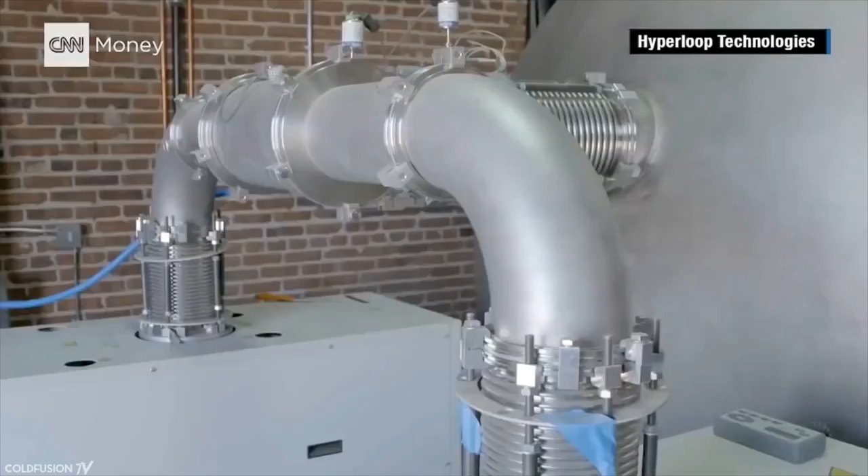In this video, we'll take a look at the Hyperloop, the brand new method of transport brought forth by the entrepreneur and billionaire Elon Musk. So let's get straight into it. First of all, what is it? Well, in broad terms, it's a fifth mode of transport. So far, throughout history, we've been using trains, cars, planes, boats, and technically rockets, but I haven't been in one, and you probably haven't either, so that doesn't really count. The Hyperloop is going to be the fifth form of transport.

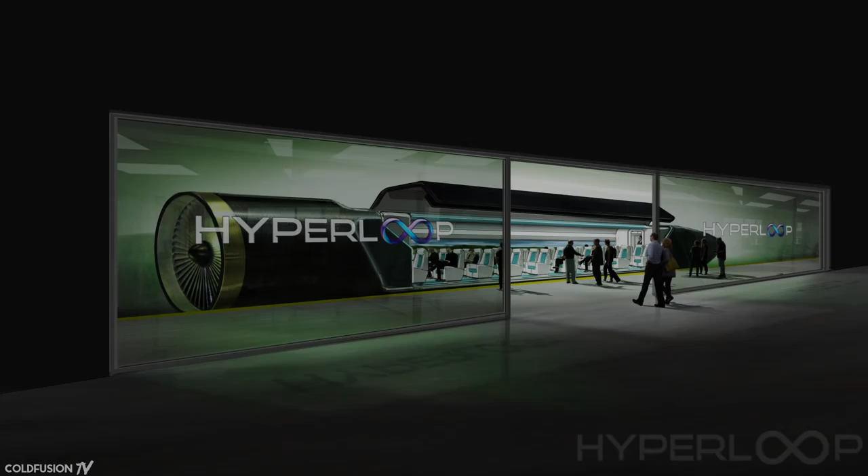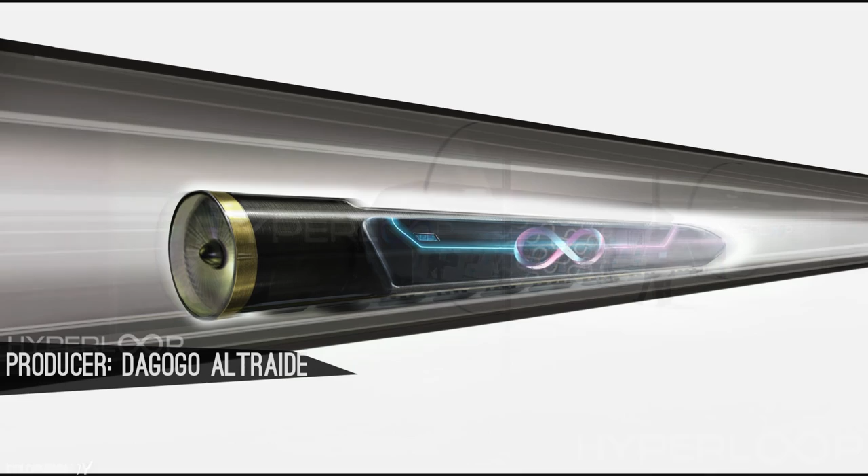So going into more specific details, the Hyperloop is a high-speed transport system in which passengers sit in a pressurized capsule that rides on a cushion of air. The capsule operates in a sealed, near-vacuum environment. The propulsion system is still to be chosen from a number of options, two of which are magnetic levitation or air pressure, similar to that of an air hockey table.

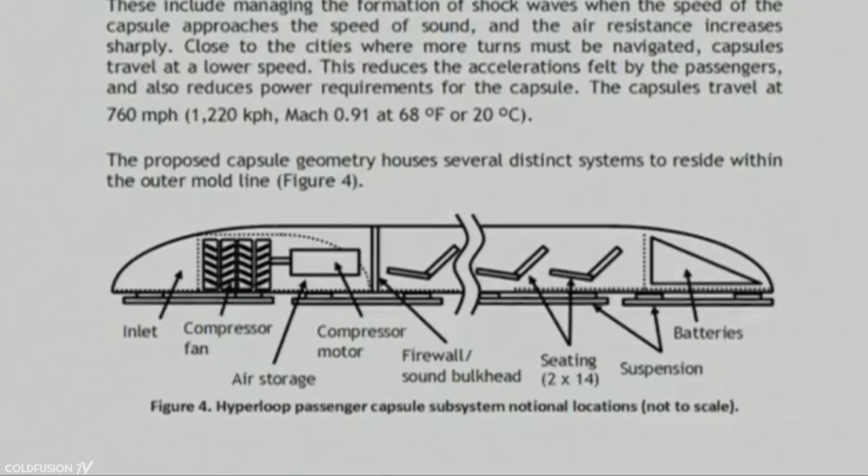The blueprints are pretty complicated. Well, blueprints are always kind of complicated, and I mean, yes, there's math, but it's really not that hard. It still sounds pretty complicated, Elon. It's like a tube with an air hockey table. It's just a low-pressure tube with a pod in it that runs on air bearings, on air skis, with an air compressor on the front that's taking the high-pressure air buildup on the nose and pumping it through the air skis. It's really, I swear, it's not that hard.

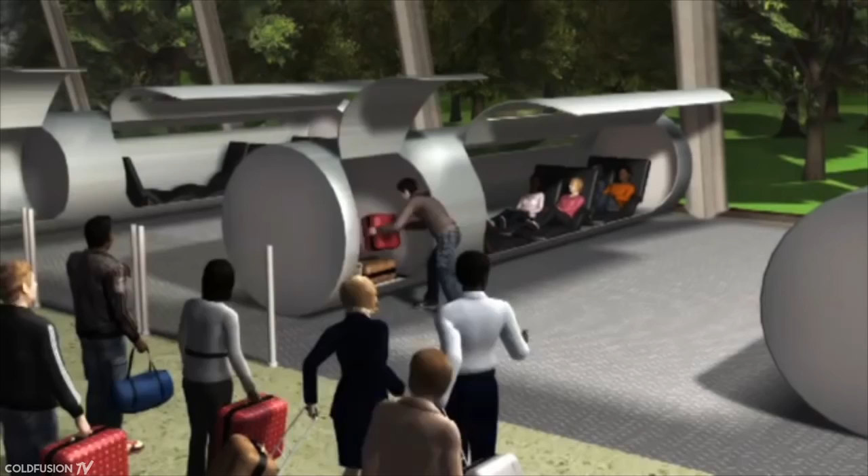The system is proposed to travel at an average speed of 900 kilometers an hour and at a top speed of 1,220 kilometers an hour. Elon really doesn't have that much time to do this one. He's too busy building rockets, electric cars, and batteries to power homes. So he's given away this idea and outsourced it in the form of a competition. Several companies have formed to take on the project, and even some all-star, interdisciplinary, student-led teams are working together to advance the Hyperloop technology. But more on this later.

So why does Elon Musk want to do all of this? What's the point? What we really intended to do with the Hyperloop was really to spur interest in new forms of transportation. And I'm starting to think this is really gonna happen. So, yeah. I mean, it's clear that the public and the world wants something new. And I think you guys are gonna bring it to them. So, congratulations.

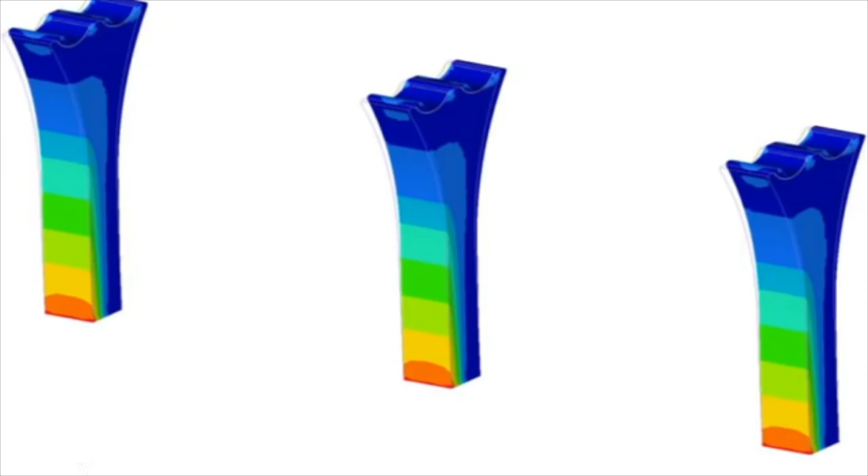Okay, so how did the idea come about? Well, back in 2012, Elon was at a Pando Daily event in Santa Monica, California. There, he announced to the world that he was thinking of a fifth mode of transport. This is that moment. And I'm thinking, like, maybe I should patent it and then offer to open source the patent to anyone that can make a credible case that they could actually do it. So I'm sort of debating it, but it would be for a fifth mode of transport. I have a name for it, which is called the Hyperloop. The Hyperloop? Hyperloop, yeah. Elon states in another interview that this initial concept came to him when he was stuck in LA traffic, which caused him to be 1 hour late for a meeting.

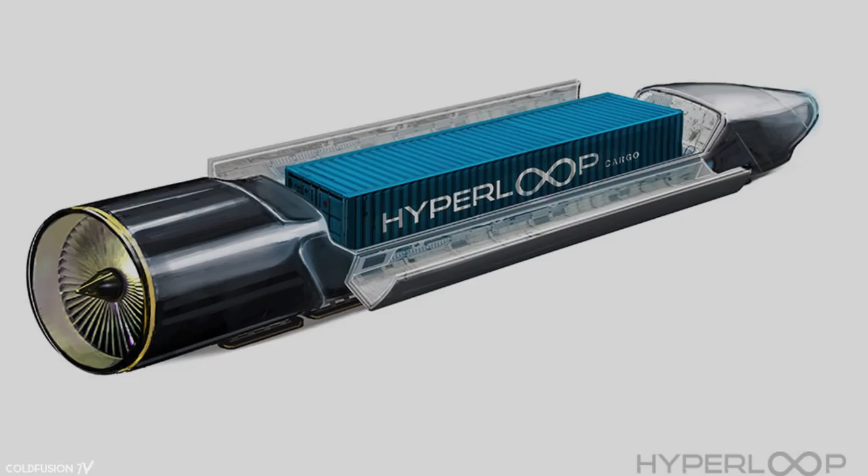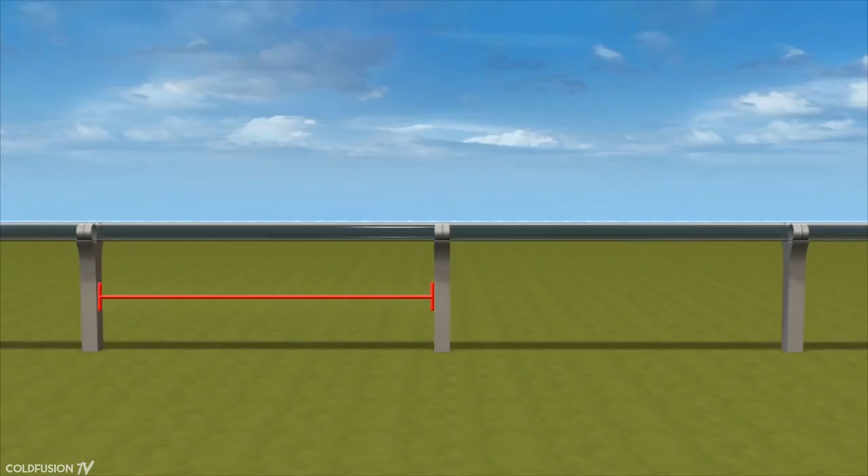So that's all well and good, but let's weigh out some advantages and possible problems with the system. First, the advantages. Theoretically, the pods can't crash. It's also much cheaper to build. It's about 1/10 the cost of the proposed California high-speed railway system. This means that tickets could cost as little as $25. It's also a lot faster. You can basically get from downtown LA to downtown San Francisco in 30 minutes, and it would take about the same time to get from Amsterdam to Paris. Just as a side note, for distances longer than that, it's actually more economically viable to use a supersonic jet.

It's also extremely energy efficient due to solar power utilization. In fact, the Hyperloop could generate more power than it consumes as a closed system. Because you generate more power than you would consume in the system. And there's a way to store the power so that it would run 24/7 without using batteries. So technically, the whole thing actually acts as a power generator.

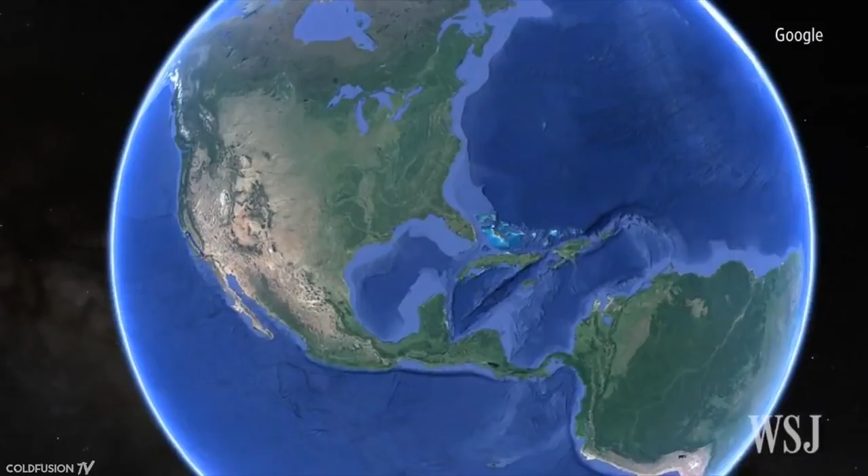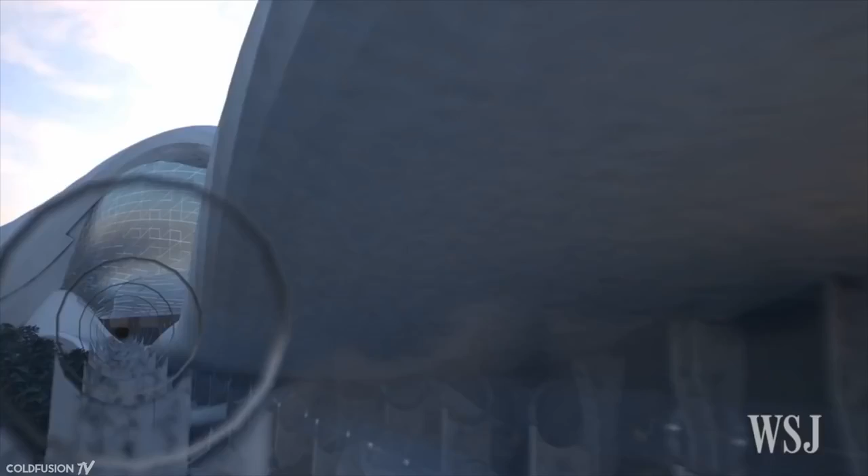Okay, so let's move on to some possible problems. Here are some thoughts from the critics of the Hyperloop. They say that the experience could be frightening because passengers would be in a narrow, sealed, windowless capsule inside a sealed tunnel. Also, the fast acceleration and noisy vibration could cause motion sickness. There are also logistical questions regarding how to best deal with equipment malfunctions, accidents, and emergency evacuations. Finally, the costs may be higher than anticipated.

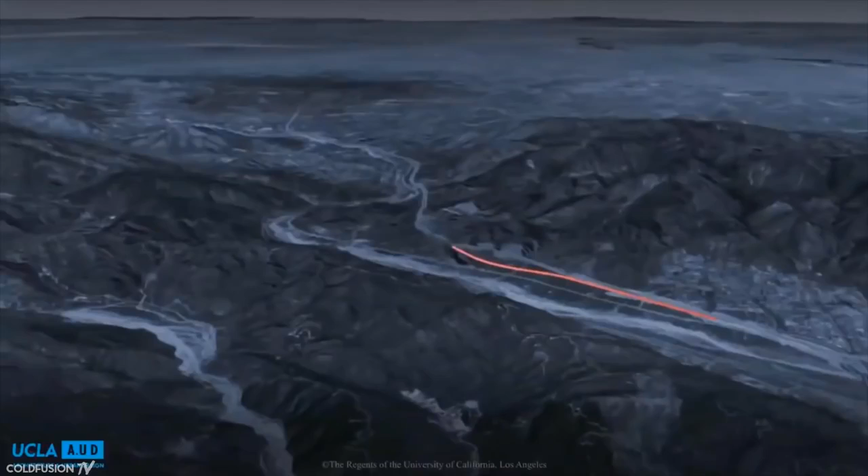Elon has stated that he realizes these challenges, but has strong faith in the skills and innovation of those working on the problem. In addition to this, designs could also change in the future for the better.

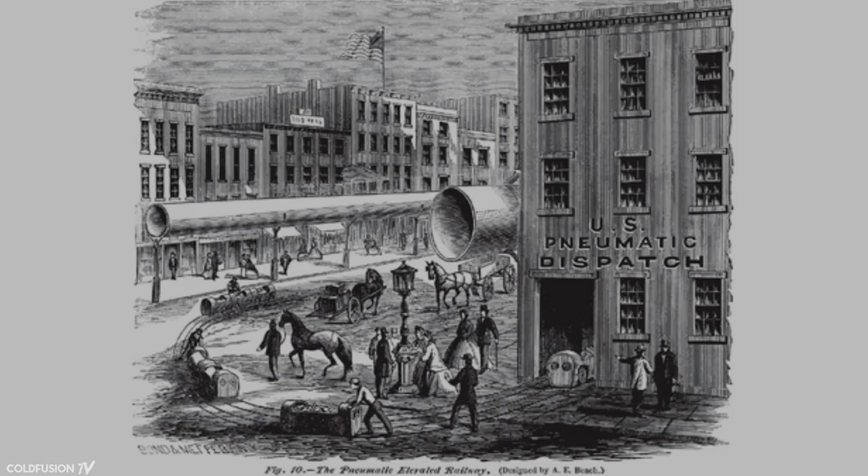Okay, so just for fun, let's take a wider perspective on the concept of the Hyperloop. You may be surprised to realize that such an idea is over 200 years old. In 1812, British mechanical engineer and inventor George Medhurst wrote a book detailing his idea of transporting passengers and goods through airtight tubes using air propulsion.

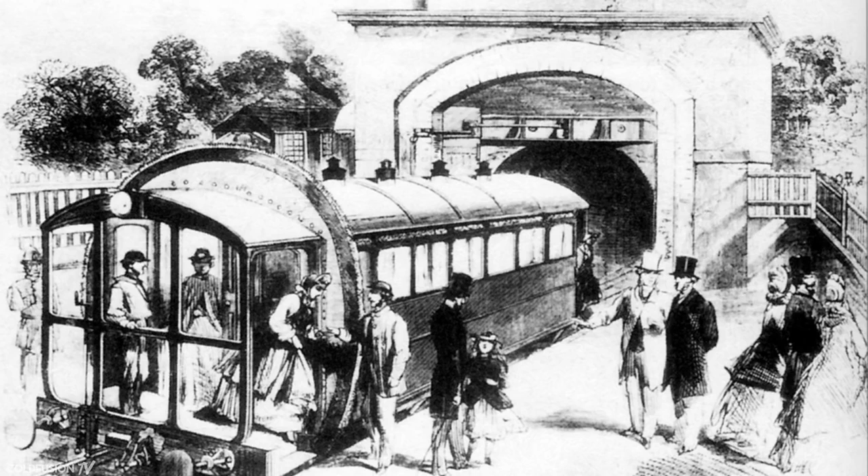The first real working application of a Hyperloop-style transport system was the Crystal Palace Pneumatic Railway. This operated through tunnels in London in 1864 and used large fans that were powered by a steam engine. The line actually operated successfully for two months before it was closed down.

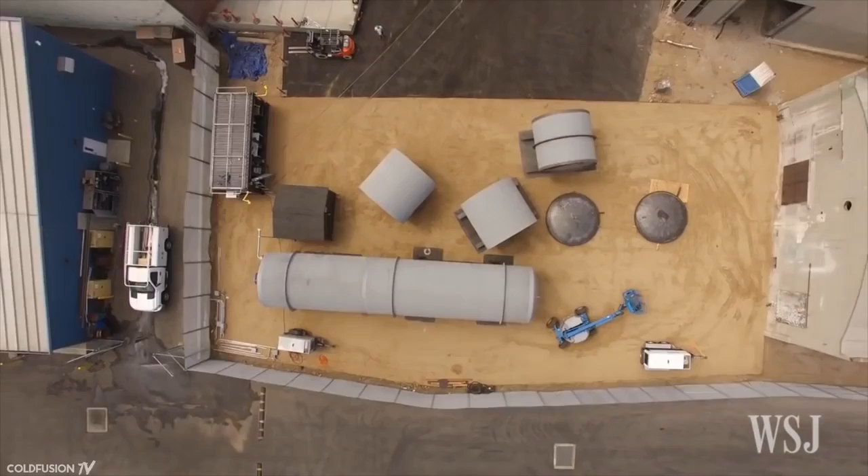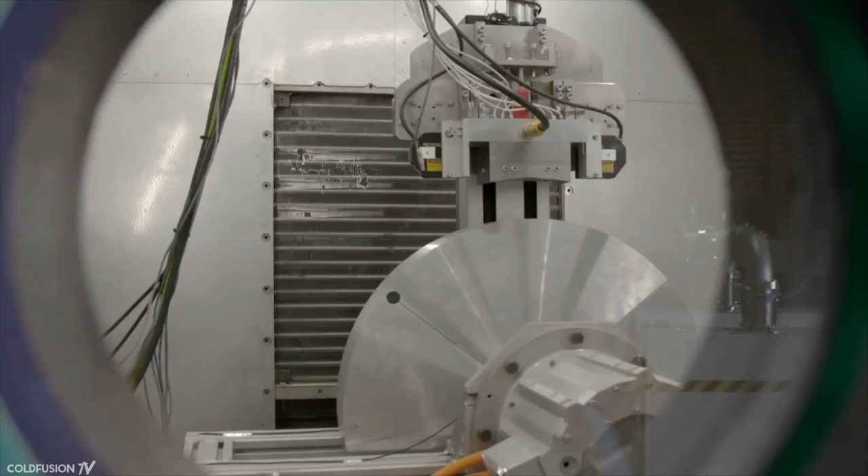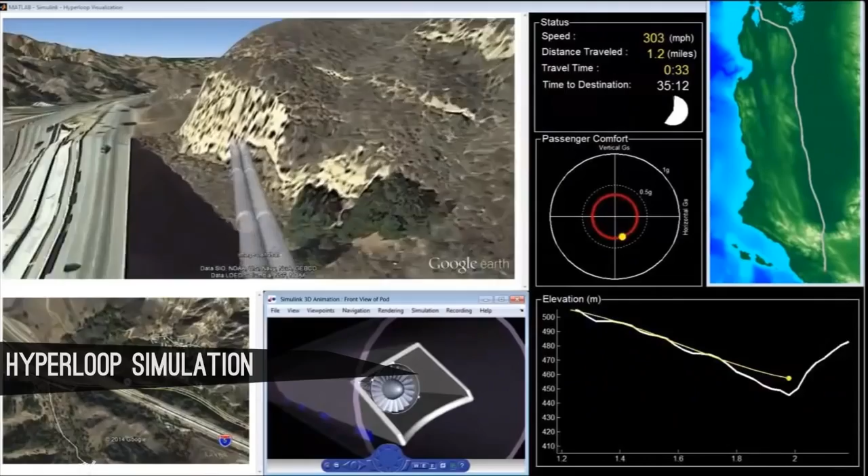There have also been other simulations and tests done by independent companies, just to see how the concept would be. For example, MATLAB ran a test with Simulink to see how the Hyperloop would perform on the proposed California route. In the simulation, we have speed at the top, passenger comfort measured in G-force, and elevation at the bottom. Passenger comfort is what we need to keep an eye on here.

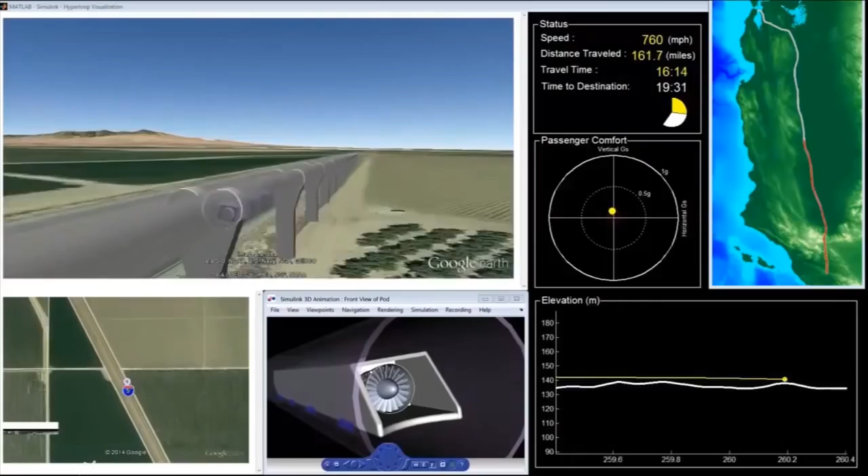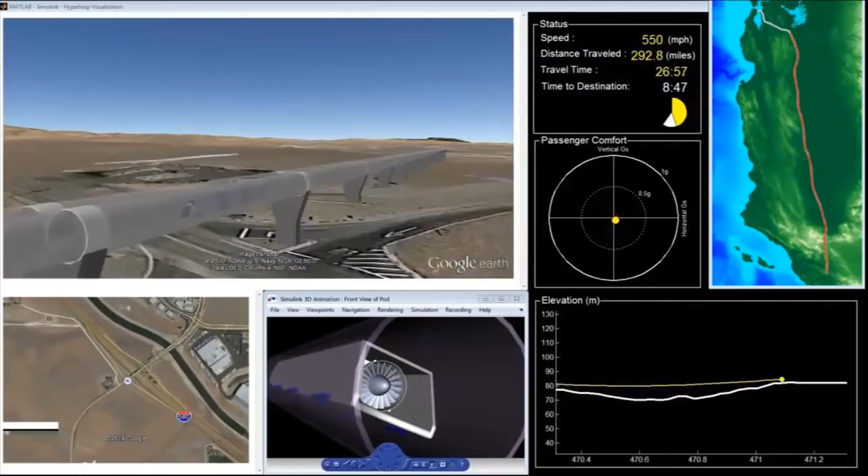Just for clarification, G-force is basically the measure of pull on a body due to a change in direction when in motion. For reference, a car turning a wide corner with a radius of 23 meters at about 50 kilometers an hour pulls about 0.8 Gs. As you can see, the passenger comfort in this simulation of the Hyperloop stays mostly within the 0.5 region due to some natural dampening by the air cushion. So it actually seems like this idea could be pretty comfortable, maybe no less comfortable than a car in fact, mathematically and theoretically speaking anyway, of course.

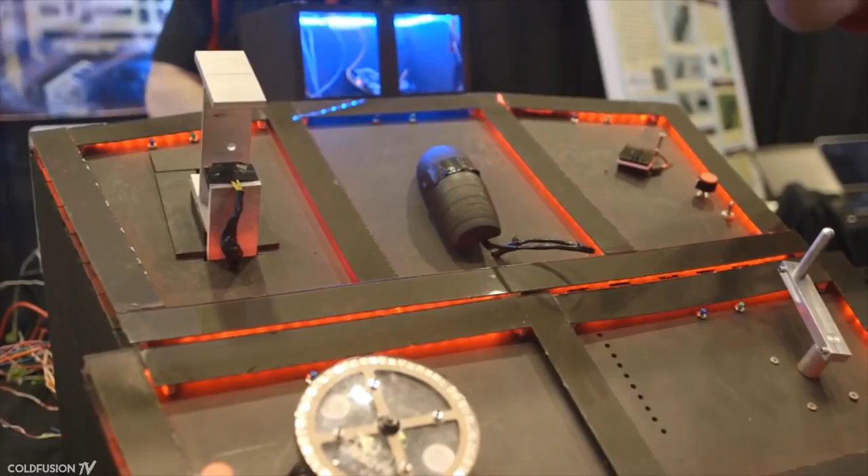Alright, so we're almost at the end of the video, but just one last bit. Let's take a look at the Hyperloop pod competition. A number of student and non-student teams are participating in a Hyperloop pod competition right now as we speak. Back in June 2015, SpaceX announced that they would sponsor a Hyperloop pod design competition. Just 1 month later, more than 700 teams had submitted applications.

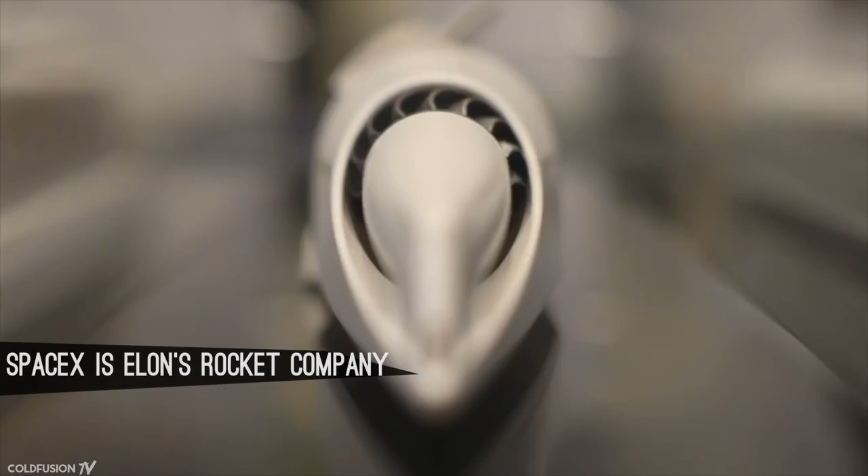In January of 2016, more than 120 student engineering teams were selected to submit final design packages. In mid-2016, at least 22 of them will build hardware to compete on a test track in California. I really think this is an amazing opportunity for young engineers, inventors, and designers to really get their minds working on something that could change history.

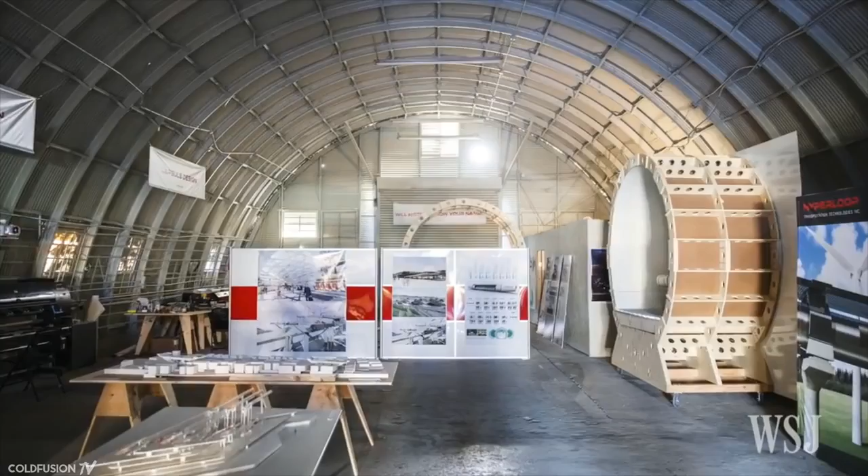It's encouraging to see. The Hyperloop seems to be a concept that could revolutionize medium-distance travel. But furthermore, the actual concept of outsourcing and openly floating ideas, designs, and talents is an amazing new way to innovate and do business within the infrastructure sector. The violent shift away from the status quo is also really exciting. We just have to watch this space closely in the future.